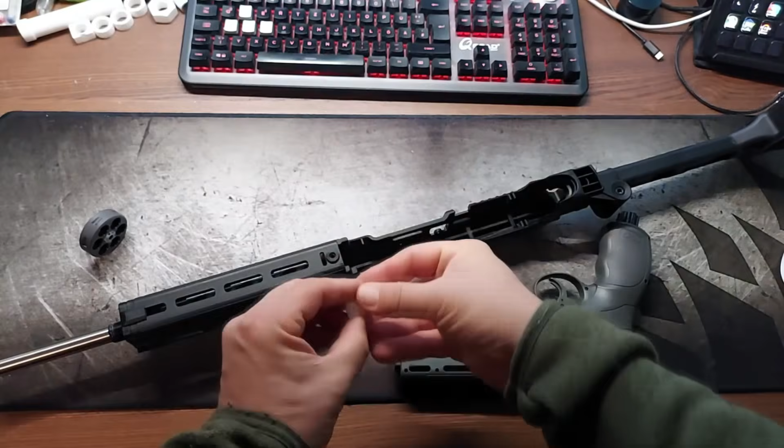Some time ago, I made a mod to the conversion kit from Umarex for the HDR50 marker, so that an additional pipe can be inserted, which functions as a barrel extension and therefore increases the energy of the marker.

This mod for the conversion kit is one of my most downloaded models on Cults3D, so it, or better you, deserve an update. I wasn't pleased with the optics of the front cap, so I decided to make something that looks like a moderator or a suppressor.

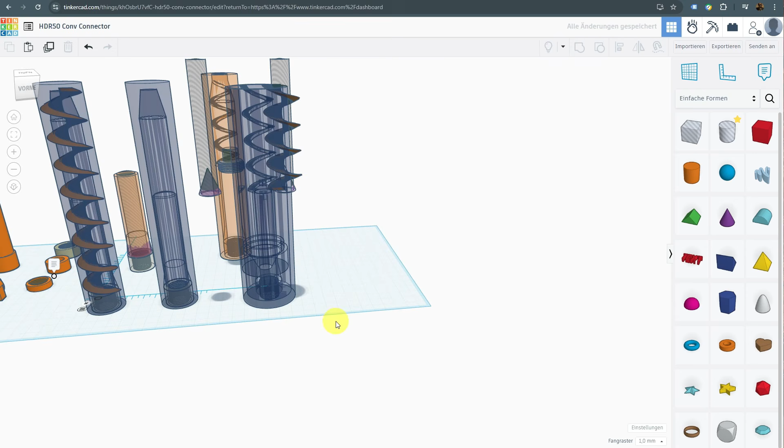I did some research on different approaches and ended up with a design that uses several baffles. I used the front piece as a starting piece, as it will again hold the pipe into place, and created some cone shapes as baffles and stacked them several times.

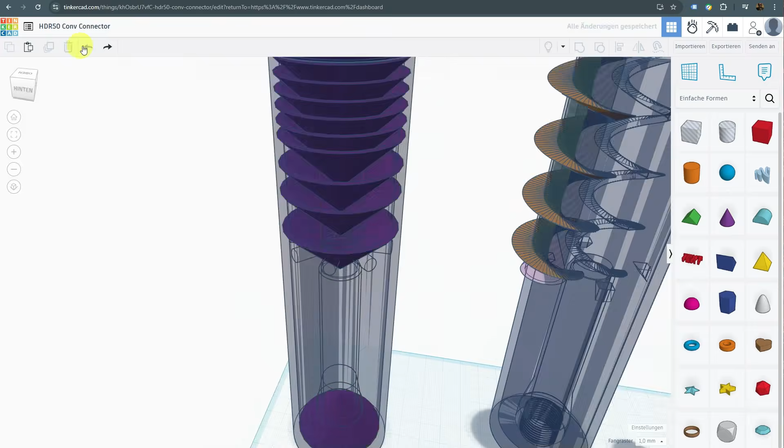Once this was done, I created a star of drillings for the first baffle after the original mod, so that the CO2 can expand into the area next to the pipe.

After doing so, I created a hollow cylinder around the interiors and added a piece with threads to screw onto the conversion kit. Please note, this only fits the conversion kit, not the tuning barrel itself, as they use different threads.

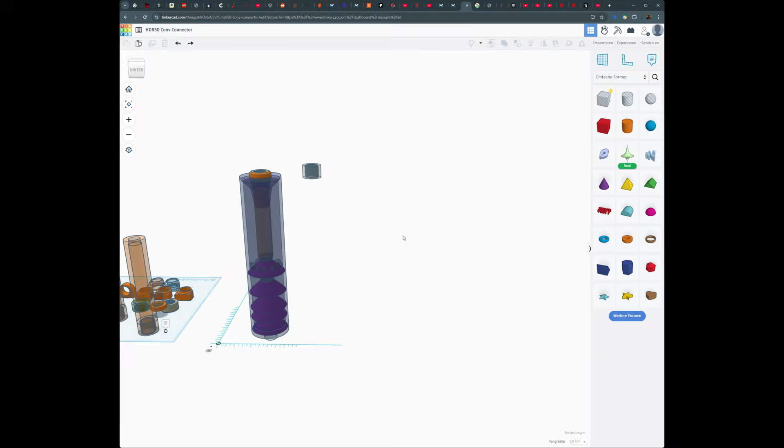How does the moderator work with my mod?

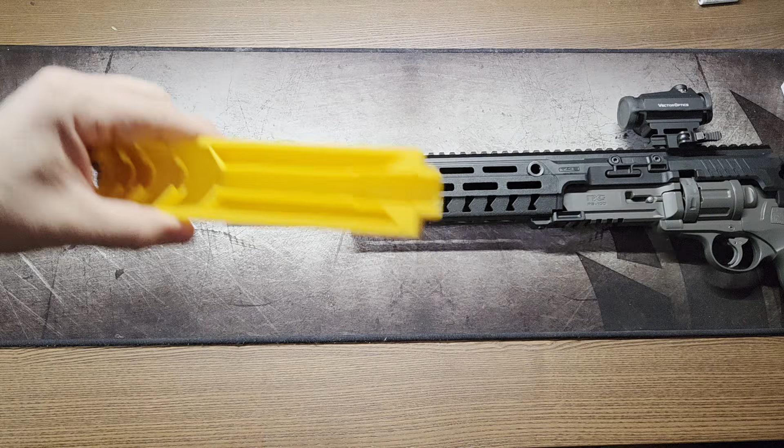We have here the gun with the expansion kit. I've taken off the cap on the front. Now I insert the pipe, which functions as barrel extension. And now we have the moderator. I printed a half one to demonstrate it.

The pipe will go into the moderator and will be held into place here so that it can't come off the front like with the original end cap. So if this here is mounted into the gun as barrel extension, and then just put the moderator in place and screw it into place. I've not printed exact the half diameter so that it holds into place.

And that's it. If you feel it's getting tight, leave it like this. When a shot is fired,

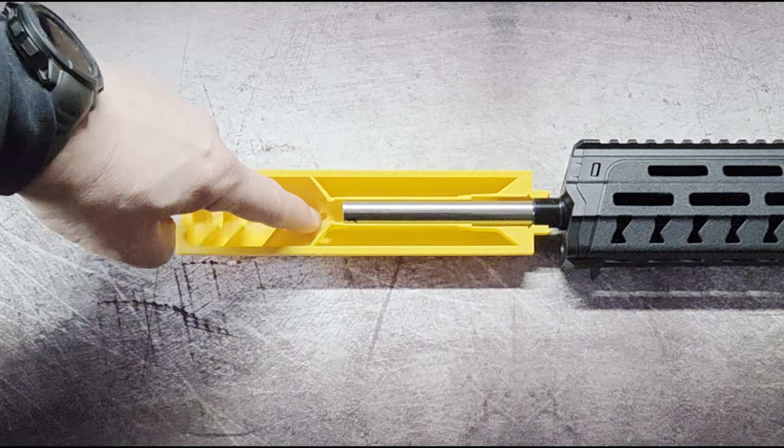the projectile passes these baffles, and because of the little holes here, the expanding CO2 can also reach this area, so that this space isn't unused. And here the baffles, like in an original or in a real moderator or suppressor, will also take some of the expanding gases.

Please note, this is not a silencer, and it can't be, because the marker has also gaps here, and there will always be an amount of gas exiting the marker in this area, so it won't be silent like with a real gun that's also not silent, but it does lower the noise.

In the next section of the video I will come up with exact figures. If you only have the marker and the conversion kit and not my mod, so that you don't use the pipe and just screw on the moderator,

it can be used like this too. First I thought about making it more open and more baffles, but it doesn't really have any impact, as this area is open here and the gas leaving the marker will come out here, so it's practically no impact on loudness. It's just for style.

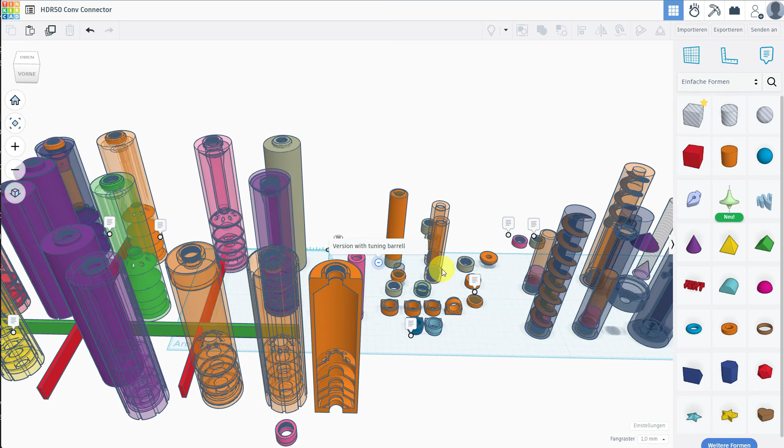Now I want to show you a bit behind the scenes of designing this moderator. You saw already the very quick process of putting it together, but here in my messy workspace in Tinkercad, here's the original mod. Here is a draft of a moderator which didn't really work, and here are the iterations of the final version.

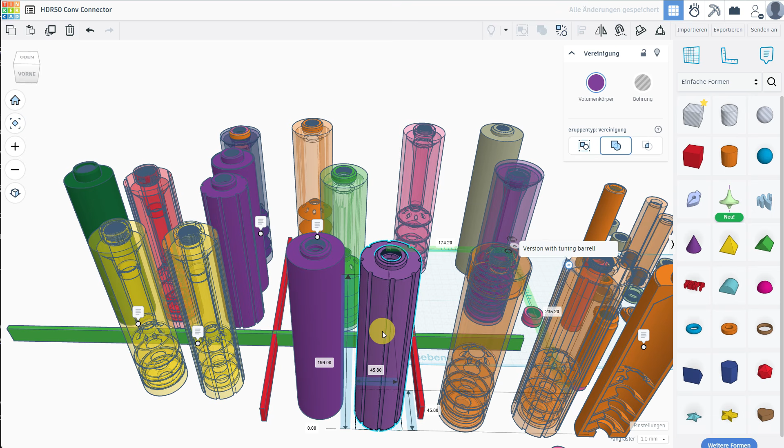And I always made one a flat version and like striped version or with a grid that has a bit better haptics and, in my opinion, better optics, but it's up to everyone what looks better.

And I did 3 different types. This is for the conversion kit with the mod installed and the tuning barrel in the gun, in the marker.

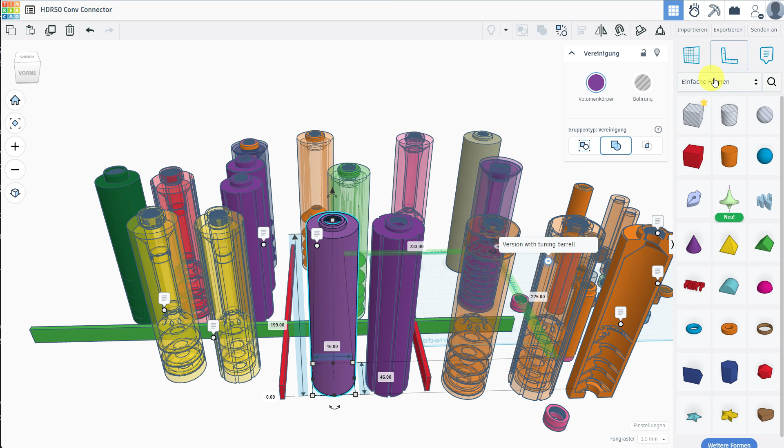This is for the vanilla HDR50 and the conversion kit, as here inside it's a difference in clearance of the pipe as barrel extension, because the tuning barrel pushes the pipe a little bit forward, so you don't have to cut the pipe. You can use the standard pipe that I provide via the link.

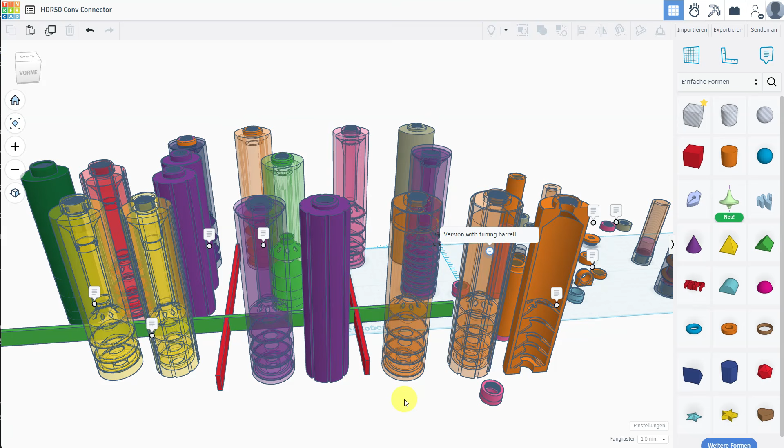And here is the version if you cut off the pipe at the edge of the conversion kit, an alternative front cap, so that the barrel extension can be used with the conversion kit for improved power. The pipe sits in here and the bullet travels through.

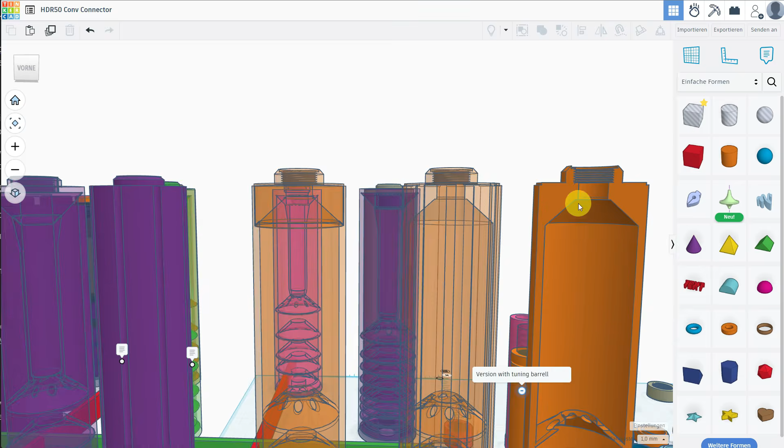I always made a cut open version of these, like this is only merged with a rectangle, with an open rectangle, and with this I double checked if there are any areas that would need supports, because having supports was a no-go for me.

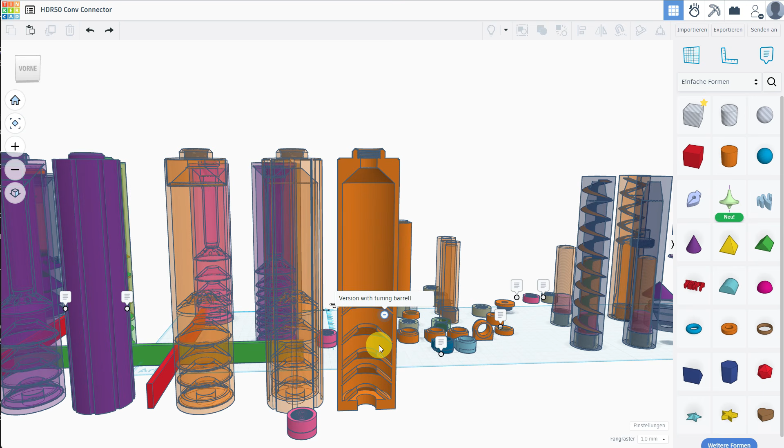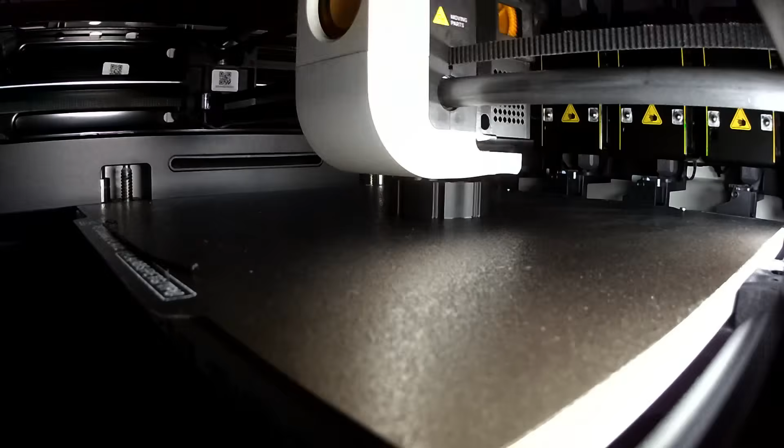The moderator is designed that it can be printed without supports. On my printer it takes approximately 3.5 hours with a 0.2 layer height.

It's just screws upon the gun, upon the marker, and be sure not to over tighten it, because

otherwise it won't cycle, or you won't be able, if you really make it tight, you will not be able to shoot anymore, because the barrel inside of the marker has to move a bit.

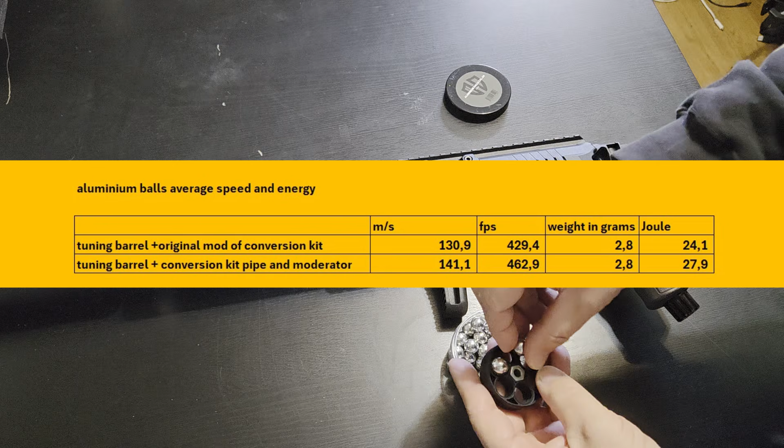As you see, I've used the chrono again, and what I did not expect was a more than 10% increase in power with the first mag of a cartridge with aluminium balls from Home Defense 24.

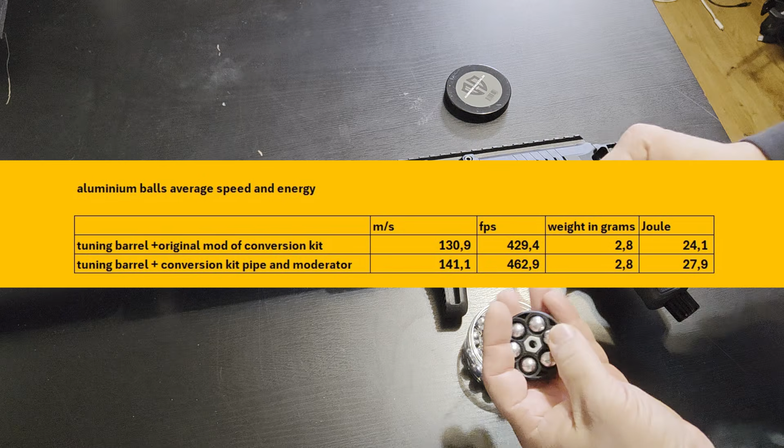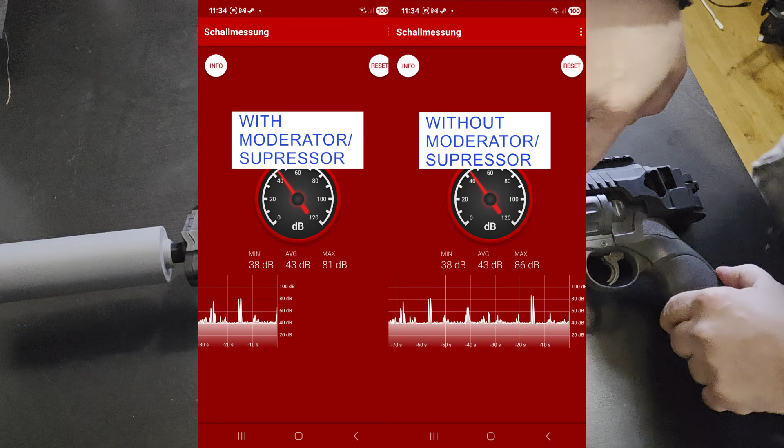I also measured the loudness with and without the suppressor. As gases can leave the marker around the magazine, the effect is of course limited. To avoid clipping of the microphone, I positioned my phone outside the room in 2 meters distance from the very cheap but closed door.

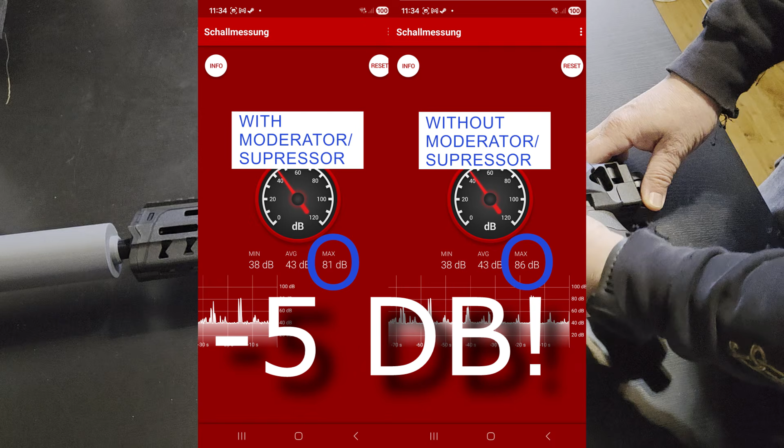I was surprised that the moderator was able to lower the noise level from 86 to 81 decibel. I also noticed that the noise of the shot sounded higher and was missing this deep shaking bang. This could be the reason for the lower noise level of the shot outside the room.

Altogether, I'm very pleased how this turned out. It's very satisfying to bring an idea into reality, and it works better than expected. This is what I really love about 3D printing, making and tinkering around.